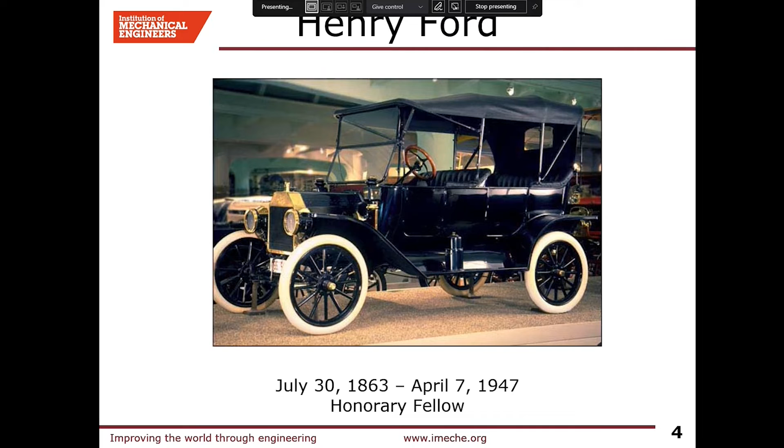And now we've just got to the second edition of the book, which was published in September. And it's very topical. We kind of tried to target it for COP27, because that's what's going on right now. How are we going to get rid of the carbon emissions worldwide? So I edited it with Steve Sapsford. You've heard about my background. Steve was Director of Business Strategy at Ricardo, chairman of the IMechE Combustion Engine and Fuels Group, it's now changed its name, and he's a visiting professor at Cardiff.

So I'm going to go through the 23 or 4 chapters of the book and talk about what all the technologies are very briefly. So I wrote the introduction, which very much talks about the fact that there are multiple alternative technologies and we shouldn't discount them. And what I'm worried about is putting all of our eggs into the electric basket. I definitely believe electricity is part of the solution, but if that's the only game in town, we might be missing great opportunities.

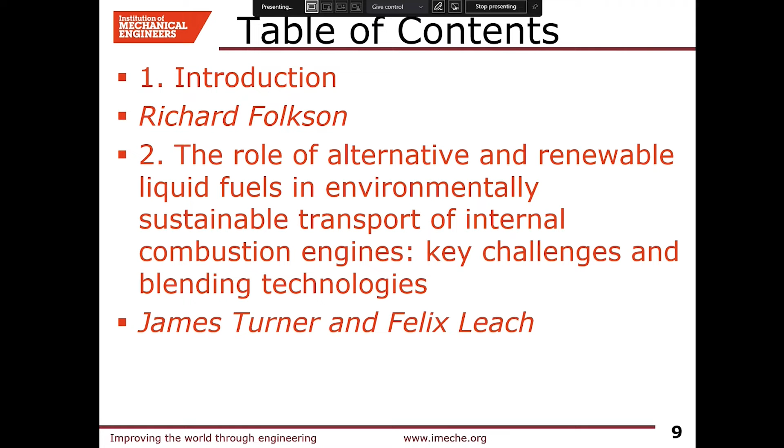Now, that's really important because, as I said, there are 200 million vehicles out there around the world running on fossil fuels. And when we get to 2030 and new internal combustion engine vehicles are banned, those 200 million vehicles are still out there. They still need to be fueled, and many of them will be used for another 20 to 30 years. So we need to find a low carbon alternative to fossil fuels for the existing fleet. That's really an important part. And Julia King didn't address that question.

You can then use the synthetic fuels to improve the environmental performance of internal combustion engines and blend them together. And the book actually splits it into 2 chapters, one more on biofuels and the other on synthetic fuel.

Then you can apply the same sort of thinking to gaseous fuels, methane, ammonia. Now, methane is not good because that's a greenhouse gas in its own right. You can use methane to combine it in other ways to make a more environmentally friendly fuel. And there are lots of other gaseous fuels that you can use as well as liquid fuels. The problem with gas is it's not quite as energy dense in volumetric terms as a liquid.

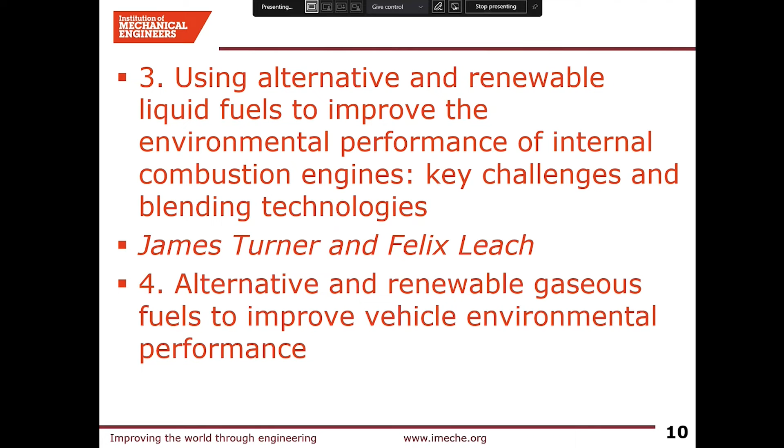So you can make them from lots of different things. Synthetic fuels made from coal. Syngas has been around for decades. E-fuels, which are electrically synthesized artificial fuels. Lots of biofuels from crops, bio-waste, methane, alcohols, ethanol, methanol, biodiesel, bioesters, ammonia, and liquid fuels made from synthesis of CO2 in the atmosphere. So this would be a very virtuous technology if you could do it at scale to absorb CO2 back out of the atmosphere and turn it into a synthetic fuel.

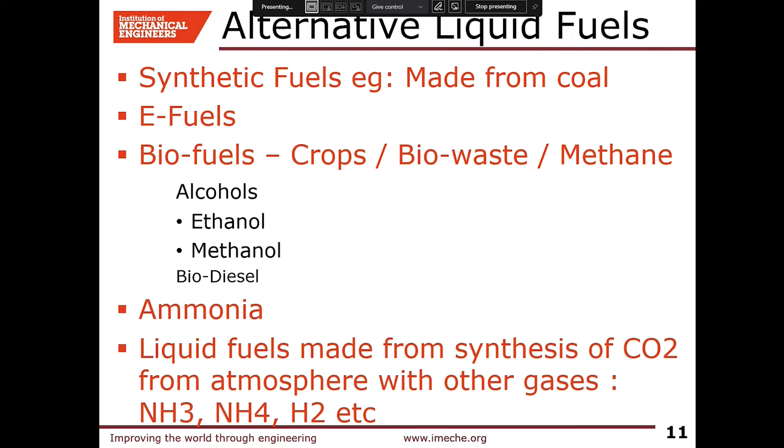The next chapter, which I wrote with a guy called Andy Atkins, who used to work at Ricardo, is on electricity and hydrogen as energy vectors for transport. There's no naturally occurring hydrogen, but you can use hydrogen to transfer energy from one source, like electricity or solar or wind, store it, and then convert it back into mechanical motion in a vehicle through either an internal combustion engine, a hydrogen fuel cell, or other means of converting the hydrogen back into mechanical energy.

One of the interesting things about the book, we actually wrote different chapters with different perspectives. So Andy Atkins wrote one part of the chapter, and then I wrote a separate chapter just on hydrogen as an energy vector for transport vehicles.

And I talk a lot about how do you produce hydrogen. There are lots of different descriptors of hydrogen now. Black hydrogen is made from fossil fuels, and that's where most of our hydrogen comes from today, about 90%. Blue hydrogen, which is kind of cleaned up black hydrogen. Green hydrogen, which is from renewable sources, and typically wind turbines or solar making electricity that you use for electrolysis, and there are no carbon emissions associated with it. That's why it's called green hydrogen.

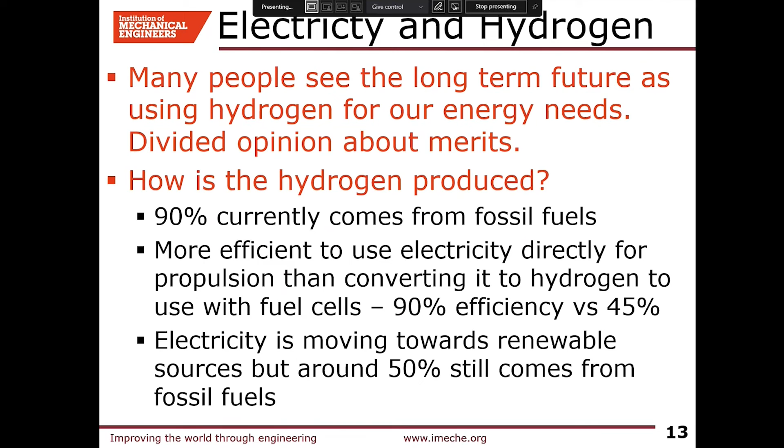The next chapter is on advanced engine oils. This might seem a bit peripheral, but you can do a lot to improve internal combustion engine efficiency with additives, oils, and cycles and concepts, which are what these 3 chapters are about. These are all worldwide experts, all the people I know from my time in the automotive industry. Keith Howard works for an oil company called Lubrizol that makes lots of additives. John Bennet was the fuels specialist at Ford before moving to Saudi Aramco. And Jaclyn Johnson and Jeff Naber work in the University of Michigan on internal combustion engines.

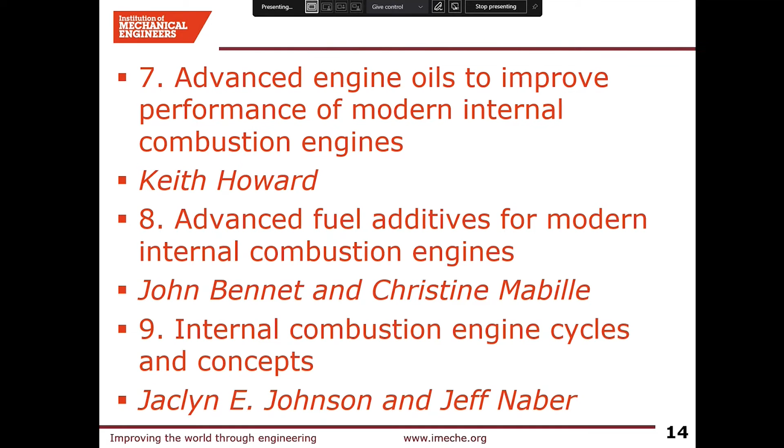And there's still a lot we can do to improve the efficiency of internal combustion engines before they're completely obsolete. I used to say to people, if you love internal combustion engines, as I used to like working on them, don't worry, they're still going to be around for the next 10 to 20 years. I know many companies stopped developing them, but there's still more that we can do.

Now, the UK has banned direct propulsion of internal combustion engines from 2030 and in hybrids from 2035. Still a little way away, but that's not really very far away in automotive company development terms. It's only one cycle of new product. There are still further improvements we can make for the next 10 to 12 years. So the internal combustion engine is not quite dead yet, even though the writing's on the wall for it.

You could then burn your hydrogen in an internal combustion engine. And one of my ex-colleagues who was the director of research at Ford said, I really can't see why, if we've got cheap, plentiful, renewable hydrogen, you'd go to the trouble of developing new technology like fuel cells, which are relatively unproven, fairly new, still in their infancy, versus burning it directly in an internal combustion engine where you get virtually 0 emissions, and it's a highly developed, proven technology with all the infrastructure to make them in place that we've been manufacturing for the last 130 years, which is a very valid point.

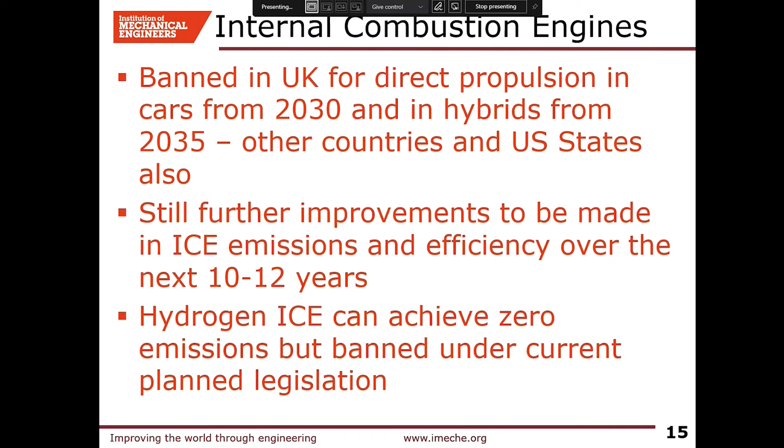So it's interesting to see whether the government allows hydrogen in internal combustion engines, particularly for heavy trucks, which we'll talk about in a moment. We get on to heavy-duty vehicles. This chapter was written for heavy vehicles. They're a real challenge because of their weight and power requirements. I started off my career at Ford working on heavy vehicles, and the interesting thing about those is the engine tends to work at 100% output or you're braking. It's a bit like a racing car, that you need all the power for climbing hills, and you need an awful lot of power for climbing hills in a heavy-duty vehicle.

And it's much more challenging to get them to 0 emissions than a car. And the amount of battery power you need in a truck is quite amazing. I have recently done an Innovate assessment on electric powertrains for heavy trucks. Some very interesting proposals, things like swapping trailers every few miles with new tractor units that are fully recharged and fast charged. There are some good ideas, but heavy duty vehicles are a real challenge.

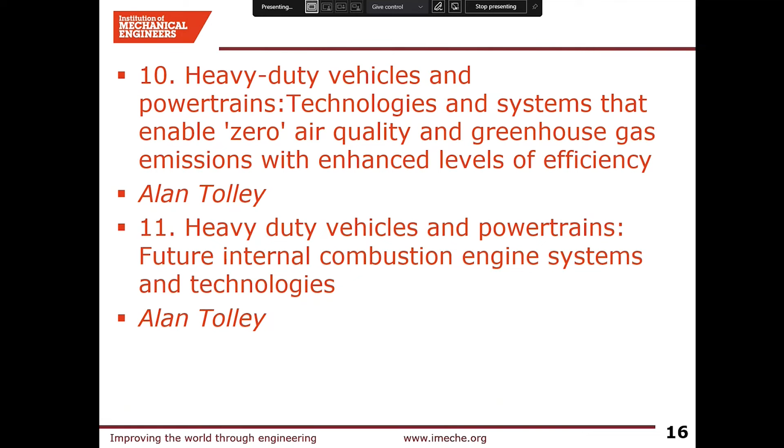Alan Tolley used to work for JCB. And then he talks about the future of internal combustion engines for heavy duty vehicles. So that's a really interesting challenge for the future. What are we going to do about heavy transport? It's much harder to switch entirely to electricity. Urban trucks, yeah, we're pretty much there now. MAN, Scania, Volvo, they're already selling electric trucks for urban cycles, lots of stop-start, relatively short distances, maybe 40 to 50 miles during a day's duty cycle. You can do that. You can package enough batteries in the truck to get back to base and recharge overnight or in a few hours.

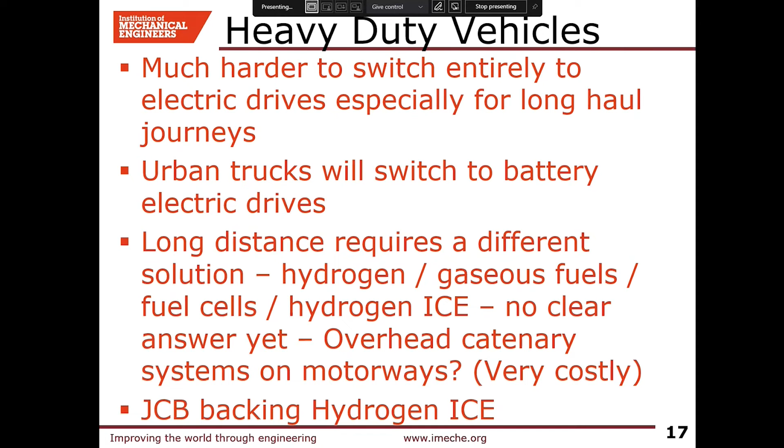Long distance needs a different solution. Maybe hydrogen in fuel cells, or as a gaseous fuel in internal combustion engines, and there isn't really a clear answer yet. I know JCB are backing hydrogen. I actually did some work for Lord Bamford, and he asked me, what's the future of hydrogen? I wrote a paper about hydrogen and hybrids, and he obviously took it to heart because he's backing hydrogen now. You could go for overhead catenaries, overhead wires like trolley buses or trams. Very, very costly to put those up the motorway for long distances, and interchanges are quite difficult. So heavy duty vehicles, really tough, no clear answer at the moment.

Then we get to light weighting. Weight is the enemy. Interestingly, Sir Isaac Newton was right. Force equals mass times acceleration. The higher the mass, the more force you need to accelerate it. So part of the answer is make everything as light as possible. Then you need less force, less power, and you can go further for the same amount of energy. So we've got chapters on conventional advanced materials to make combustion engine materials lighter, stronger. Although Khamid Mahkamov is actually Russian, he works at the University of Lancaster. But he did insist in his chapter in using lots and lots of Russian standards for materials that he specified, but we'll let that ride.

Advanced transmissions can help to improve overall performance, reduce losses, and sustainable design through lightweight vehicle structures. Glenn Daehn's a lecturer in the US on lightweight vehicle structures, things like carbon fiber instead of steel. Steel is still a relatively efficient material in terms of strength per kilogram. And unless you're making your vehicle very, very thin and not needing very much strength, steel's still competitive with aluminium in lots of cases.

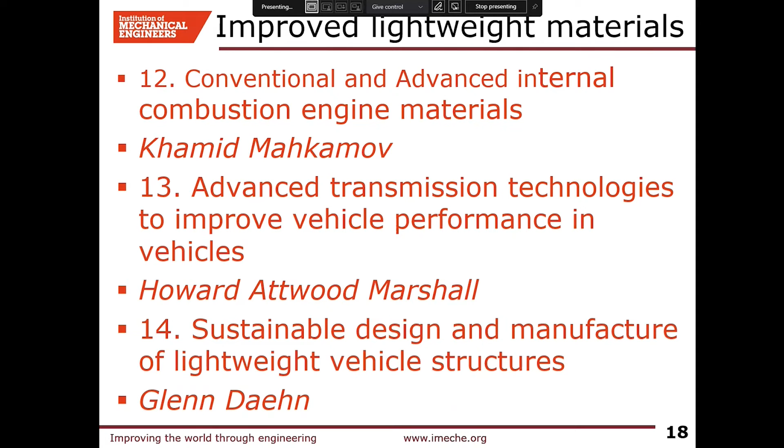Aluminium is not the single answer for lightweighting, but there are lots of new materials coming along, so lightweighting is an important element of this multifaceted challenge. Then you can improve rolling resistance and aerodynamics. Kevin Chow's an aerodynamics expert from MIRA, the Motor Industry Research Association in Nuneaton.

We didn't really update this next chapter on mechanical and electrical flywheel hybrids. Keith Pullen's a lecturer at City University. And when we did the first edition of the book in 2014, there was an enormous amount of excitement and enthusiasm about storing energy in flywheels. A friend of mine who was the president of the IMechE after me started a company called Flybrid, making high-speed flywheels that spin at 60,000 RPM in a vacuum to absorb energy and then give it back when you're accelerating.

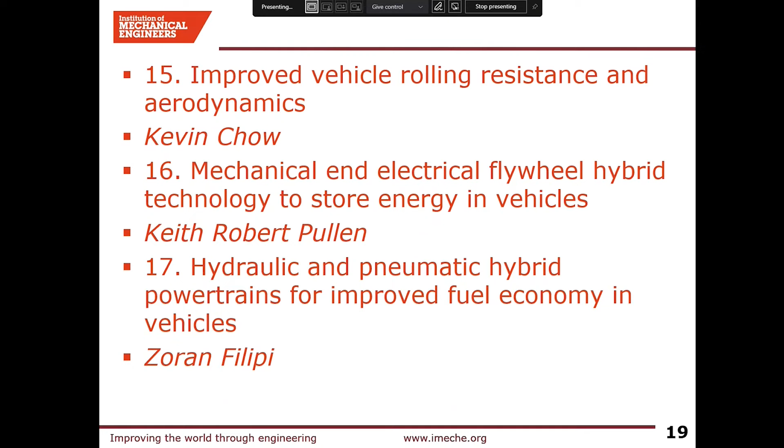He sold his company for a vast amount of money to another company, which then went bust. And flywheel technology seems to have gone down a blind alley, really. It doesn't seem to be getting anywhere. Similarly, hydraulic and pneumatic hybrids seemed to be an idea in 2008. Zoran Filipi's an expert in those, but flywheels and energy storage doesn't seem to be the flavour of the month at the moment. It might come back.

Then you can recover a lot of energy from regenerative braking. My hybrid Mondeo recovers a lot of braking energy, and it's interesting, it's never done less than 52 miles to the gallon, which is amazing for a 2.5 litre petrol car. And if I look at the energy monitor, more than half of my driving is on pure electric mode, where it's recovered energy during braking, gives it back during acceleration and cruise, and about 53% of the drive time is in pure electric mode from the battery, which is in the boot.

Then we have a chapter on battery technology from Neil Johnson, who worked for Johnson Matthey in the US. Battery technology is an area that has advanced enormously in the last 8 years. Loads and loads of developments in battery efficiency, durability, lifetime, range. It's a very extensive chapter. There's a lot going on in battery technology, and then a second chapter on lithium-ion cells in particular, and other emerging storage technologies. Things like solid-state batteries seem to be very topical at the moment. So there's loads going on in batteries.

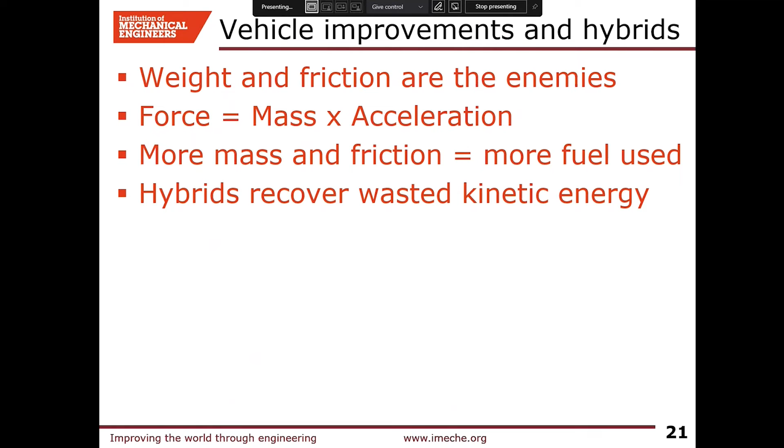And as I said, electric vehicles and batteries are part of the solution, but they're not the only solution, promoted by Julia King. I've already quoted Newton. Weight is the enemy. Weight and friction. More mass and friction means more fuel used, and hybrids can recover some of that. So that's the reason for talking about these technologies.

And I wrote in the book, there's the Folkson constant. It doesn't matter when you look at history, electric cars are always going to overtake internal combustion engines within the next 10 years. They might eventually, but that's still true now. We haven't got there yet. Electric cars are about 10%. They're not more than 50% to get to overtaking internal combustion engines. And they're still very, very expensive. My view is electric cars are really a product for the relatively wealthy.

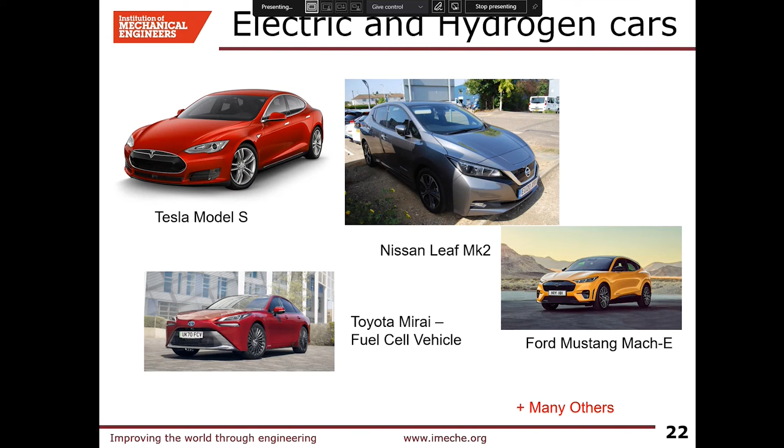Let's just talk a little bit more about electric drives and storage. Lithium-ion is currently the best solution we have for batteries, but there are real concerns about the finite resources needed to manufacture the battery. And it's so energy intensive to extract the minerals and then turn them into a battery, that it's calculated that it would be equivalent to 2 years of fossil fuel usage in the car, 2 years of diesel or petrol in your vehicle, to balance out the energy and emissions just to manufacture the batteries.

So they're not a completely zero emission solution. You've still got a lot of emissions before you start getting a zero emissions payback after a couple of years. And they're double the cost of a conventional vehicle. Most consumers spend around £1,500 to £2,000 a year on fuel, even at today's high fuel prices. So it takes you a long, long time to break even on your twice or 3 times as expensive low carbon vehicle with fuel savings.

I calculated that comparing a diesel Ford Focus with a Nissan Leaf would take 10 years to recover the added capital cost of the car before I'm getting a payback on my fuel savings. And that was with the £5,000 government tax rebate for electric cars, which, by the way, they've just taken away, and they're now talking about taxing electric cars with vehicle excise duty. So they're not that cheap.

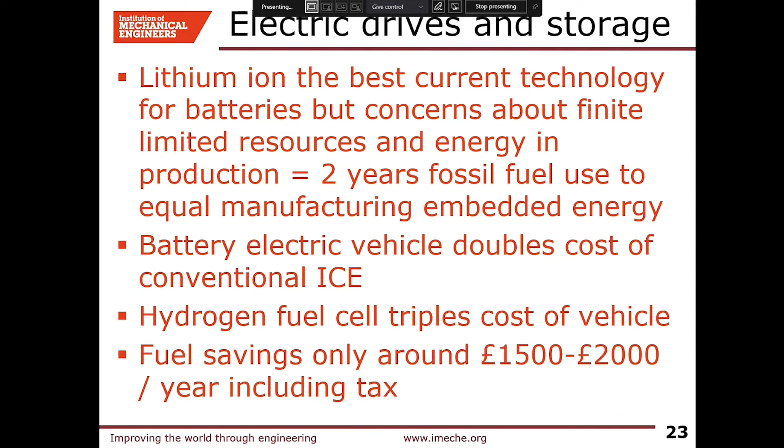Next chapters were on conventional fuel hybrid electric vehicles, so hybrids like I drive, where you can recover energy. Then a chapter on pure electric vehicles by Al Cairns, who's another lecturer from Oxford, I think. Then a chapter on fuel cells, hydrogen fuel cells, which are an interesting and emerging technology. It's a very simple technology.

It's the reverse of the experiment we all did at school, when you put 2 electrodes in a beaker of water, pass a current, and you get hydrogen and oxygen off. If you reverse that, put hydrogen and oxygen together in a membrane and get the hydrogen and oxygen to combine into water, you get electricity given off, and you can use that to drive your electric motor. So it's relatively simple. It's a bit harder to actually make it work, and you need 99.999% pure hydrogen so you don't contaminate the catalytic membrane where that chemical reaction happens.

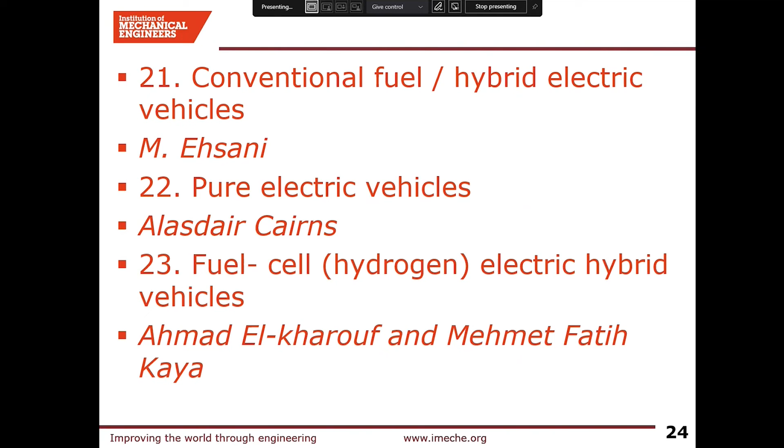And then lastly, I'm sort of on time to have plenty of questions, there was a final chapter on autonomous vehicles, sometimes called self-driving cars, and also what are called intelligent transport systems, where the vehicle interacts with other cars and its surroundings to make them safer. The primary driver for autonomous vehicles is safety, because we can prevent far more accidents from happening. 95% of accidents are caused by human error. Get rid of the human element, you can reduce accidents by more than 90%, which is a good objective.

But they can also play a role in reducing vehicle emissions. And this is a really excellent chapter by a group from, I think they're from Oxford, led by Kevin Vincent. And they really talk about the fact that you can optimize the drive cycle, take away control of the accelerator from the driver so that the vehicle optimizes fuel use. You can manage things like congestion, aerodynamics, all sorts of other factors come into play to utilize the autonomous driving systems to reduce emissions.

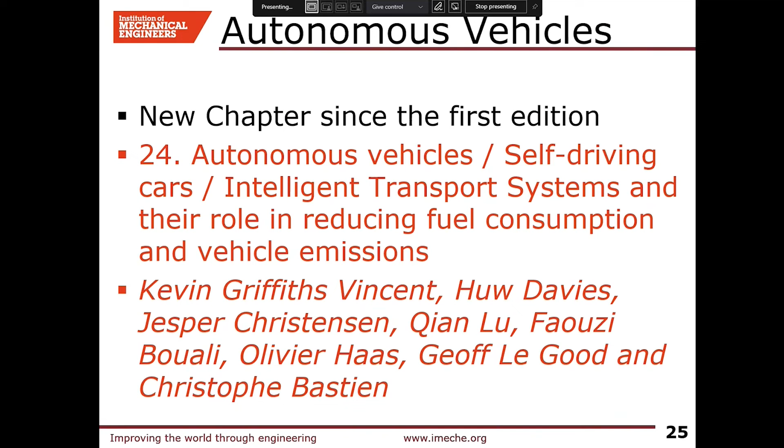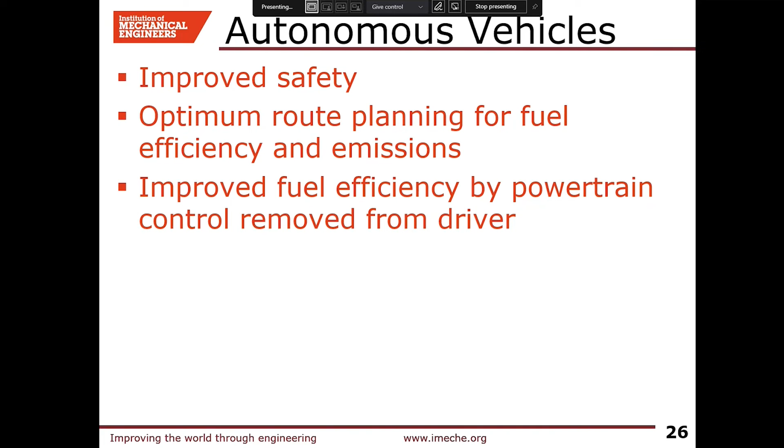So they're primarily for safety, but you can optimize route planning, get rid of congestion, and you remove control of the powertrain from the driver for optimum efficiency. So here's a nice line of Toyota Priuses. With autonomous driving, they can all bunch up very closely. You get rid of aerodynamic drag. You can make much better utilization of the congested road network.

You get more cars on the road, so you don't end up with so many traffic jams and so much stationary traffic. The most polluting vehicle of all is a vehicle sitting in a traffic jam with its internal combustion engine running, because its emissions are effectively infinite in terms of grams per kilometre, because the kilometres are zero. So whatever the pollutants are in grams, you divide the number by 0, and if you divide any number by 0, you get infinity. So you don't want to sit in a traffic jam with your engine running, hence all the stop-start systems that are fitted to pretty much every car today.

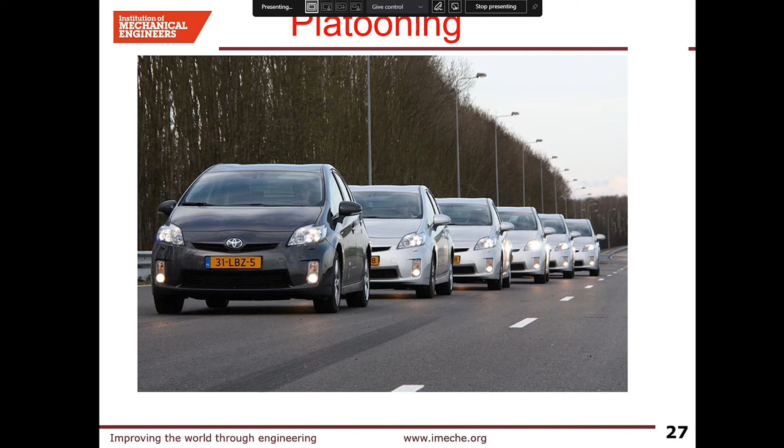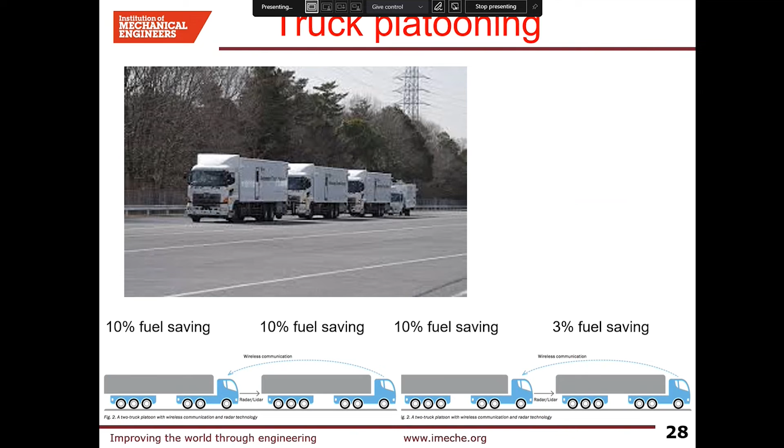Very useful for cars, something called platooning, even more useful for trucks. Now, most commercial vehicle operators would bite your hand off for a 3% fuel saving. But when you've got them all closely together, driving autonomously and collaborating with each other, you can close the gap up so you greatly reduce the aerodynamic drag, giving all the following trucks a 10% fuel saving, and the leading truck is still getting a 3% fuel saving because it's actually being helped along a bit by the reduced drag of the truck behind it in the vortex behind the trailer. So platooning for trucks is a really, really valuable technology as we move towards lower carbon emissions.

I'm just about at the end now. In conclusion, there are enormous technical challenges in terms of getting to low carbon emissions. And there's been fantastic progress made in the last 8 years since the first edition of the book was published. There's no single technology that's going to get us to zero carbon. While I partially agree with Julia King in her report that the answer is partially electric, it can't be wholly electric. And we need to work on all these other technologies, particularly the synthetic fuels, to address the legacy fleet of existing vehicles if we're going to really make a difference in the next few years.

And as we're hearing about COP27, it's really urgent. Now, we've all seen the extreme weather we've had in the last few weeks. Where I live in Cambridgeshire, we've had really intense thunderstorms, hail, very, very heavy rain, strong winds, things that I don't remember earlier in my life. And I'm sure that's climate change.

So there's no single technology, but cost is the most important factor. Because if people can't afford the technology, either because they don't have enough income or, as a commercial vehicle operator, it doesn't make economic sense to buy the technology, they won't buy it. It's got to be affordable technology. So cost is the most important factor.

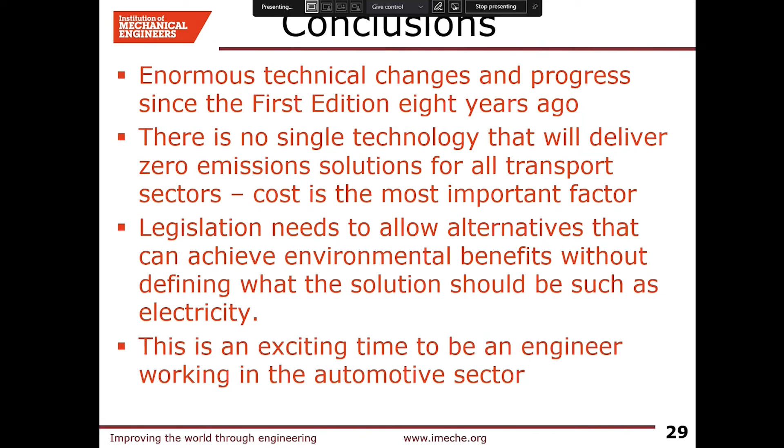We need legislation that allows alternatives. I'm quite concerned that the government has said internal combustion engines are banned from 2030. They are picking a winning technology that might not be the right answer. So we need engineers like us to have more freedom to identify better solutions than just saying they have to be electric. So this is a really exciting time to be an engineer. I think there's more going on now than at any time since I started working in the automotive sector over 40 years ago. So it's a really exciting time to work on it. And I find all these technologies really interesting as technical challenges moving forwards.

So I said I'd take an hour, that was 50 minutes. I've galloped through. I'll say again, I'm not trying to sell the book. I was just trying to use it to show you that this is a complex question with many, many alternatives that are worth exploring. And that was really the point of writing it in the first place. So I'm happy to answer questions.

Thank you. Thank you, Richard. Let's give Richard a round of applause. So, yes, always on time, as he said he would be. Thank you, Richard. So it's over to you now, audience, for a few questions. Remember, he said he lives in Cambridgeshire now, so we're not going to keep him all night. And if we can wait for the microphone to actually reach you, that helps those with hearing aids to understand the question. So I do see my stalwart regulars, but I'm going to skip you for now because I know you can take it. So I'm going to walk over here. First question.